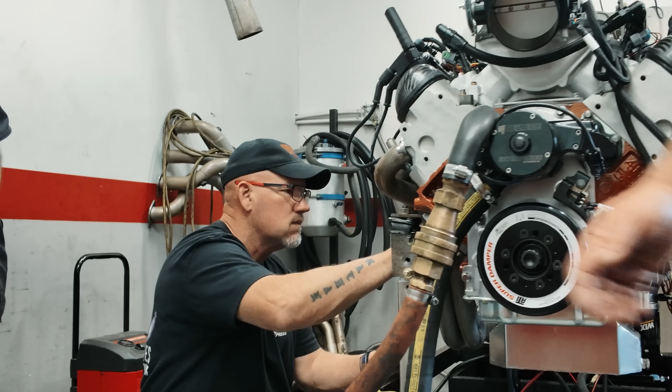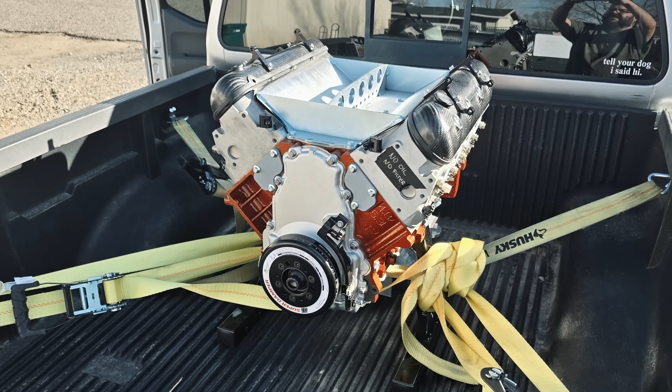It's been a long journey, but we're finally ready to get LS 5.0 on the dyno. We've got our intake manifolds ready, the engine in the back of the truck, and tomorrow we'll head down to Outlaw Race Engines in Phoenix and drop the engine off to get it on the dyno. Then we'll finally see what this thing can do.

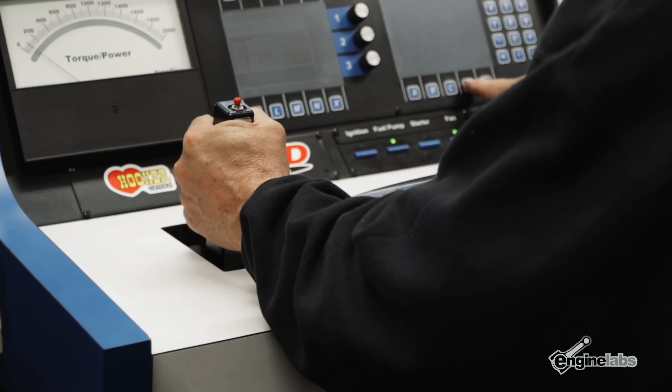The original LS vs. Coyote shootout was where we pitted an LS3 engine versus a Gen 1 Coyote engine, both with a $9,999 budget, to see how the two stacked up in peak power, average power, power per cubic inch, and usable power curve. In that competition, the Coyote was a Gen 1 long block with Manley rods and pistons with the stock crankshaft, making 11.3 to 1 compression.

The stock heads were outfitted with Comp Stage 3 camshafts, Comp valve springs and retainers, Boss 302 timing components, and a Boss 302 intake manifold. On the dyno, the engine made 510 horsepower at 7,600 RPM and 398 pound-feet of torque.

Now, it's time to hop in the truck and head to Outlaw.

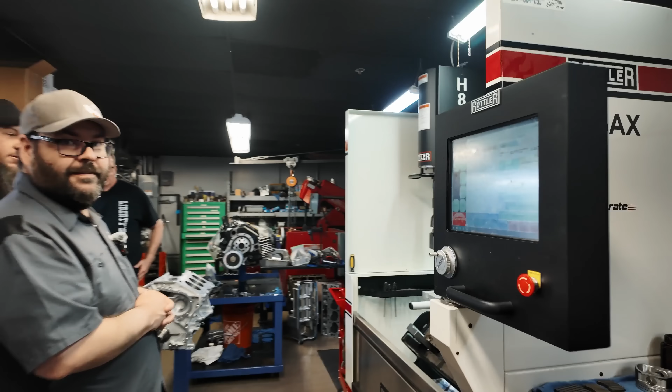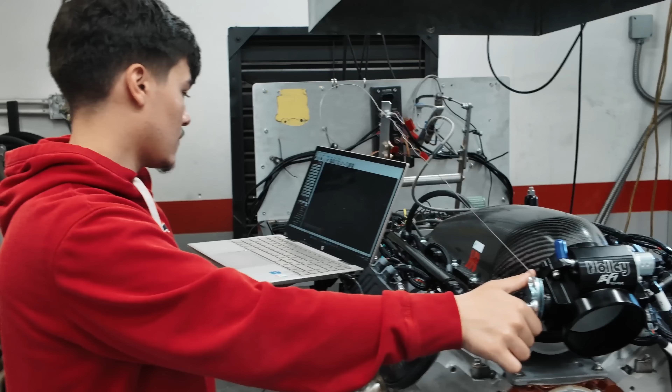All right, we're here at Outlaw Race Engines in Phoenix, Arizona to dyno LS 5.0, and I'm here with Richard. Richard, tell me a little bit about Outlaw. So Outlaw started in 2017 off of Bethany and 55th Avenue in a little 3,500 square foot shop, just as a machine shop only, actually. We didn't do anything with cars. We didn't even have an engine dyno at that time, but then as we grew in 2018, we moved to this building. Then engine dyno, hub dyno, full machine shop, and made it a service center.

Well, I noticed, we did a quick little walkthrough, and you guys do everything. There's a full build shop, a full machine shop. There's everything under the sun back there. It's not just late model stuff. I saw some pretty cool Coyote stuff. I don't know if I'm supposed to talk about that. Hopefully, LS 5.0 is going to be fun for you guys. It's not quite Coyote. I'm not even going to. I don't even want to say those two words in the same sentence.

Yeah. But we're going to spin pretty high. And so I have the utmost confidence that you guys are going to extract every horsepower out of that. So I'm really excited for that. So why don't we get back, because it's on the dyno, and let's get to making some noise. Let's go.

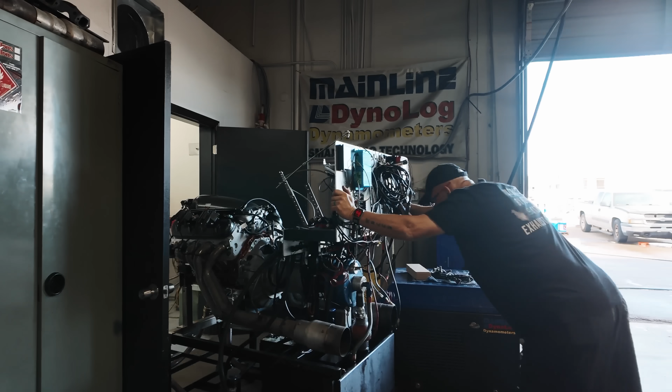Okay, so to recap, Project LS 5.0. This all started as a back of napkin type of project. I built an engine in Comp Cams' dyno simulator in order to answer a question we had from the first LS vs. Coyote challenge. So I built a 5-liter LS, and on paper, it looked like a great idea. So we started building it in real life. Unfortunately, we started building this at the beginning of 2020. We all know what happened in 2020, 2021, 2022. So this has taken a while.

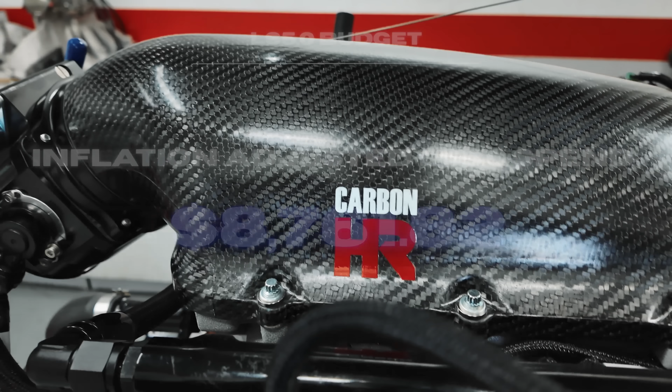But the idea behind this was to loosely mimic the rule set of the original LS vs. Coyote shootout. So that means 11.3 to 1 compression, 91 octane, no exotic materials, street style intake, and a $10,000 budget. Well, because we were doing this 6 years after the original LS vs. Coyote, we had to adjust the budget for inflation, but this came in significantly under the budget cap. So much so that we could have carbon fiber. Stock 4.8 liter crankshaft.

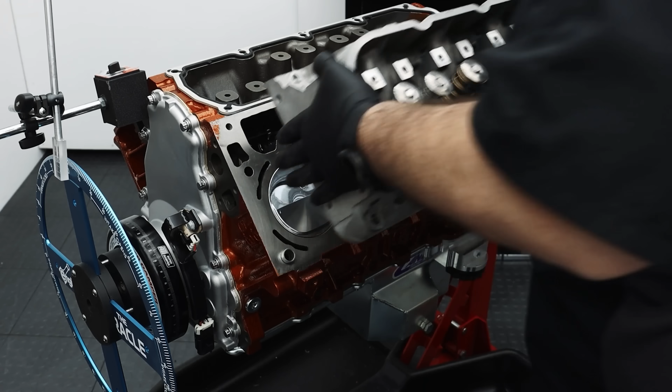It's a Gen 4 engine, so it's a 58X reluctor wheel. We've got Manley rods and Diamond pistons in it. Up top, we use the 799 heads that came stock on the LY2 core engine, CNC ported by Lingenfelter, with 2.02-inch intake and 1.575-inch exhaust hollow stem stainless steel valves.

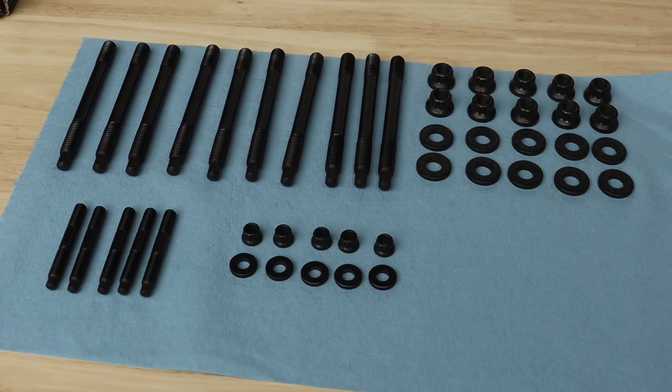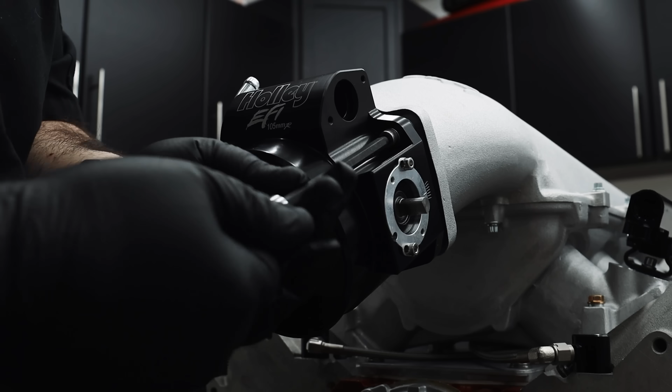We used an off-the-shelf Comp cam, Comp Evo hydraulic roller lifters, XDA pushrods, and Comp BSR rockers. In order to perform higher in the RPM range, we used a Holley Hi-Ram intake manifold with a Performance Designs 105mm carbon fiber lid with a Holley EFI mechanical throttle body. And it's just an all-around budget-focused, naturally aspirated LS engine that hopefully will spin to 8,000 RPM.

And ideally, the premise, going all the way back to the beginning, is that we can make an LS that has the same power and the same power band as the Coyote in the original LS versus Coyote. So the only thing left to do now is for us to go fire it up and make some noise and see if it's gonna do what we hope it'll do.

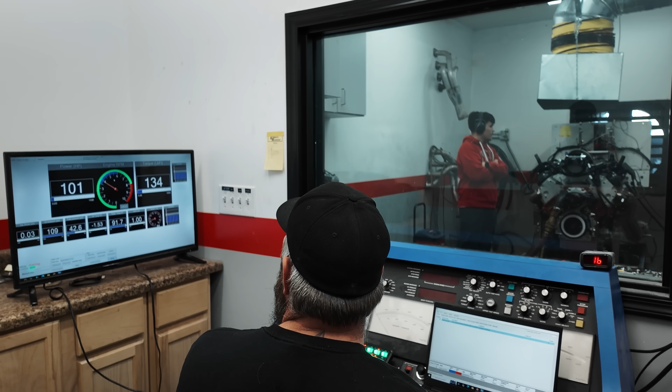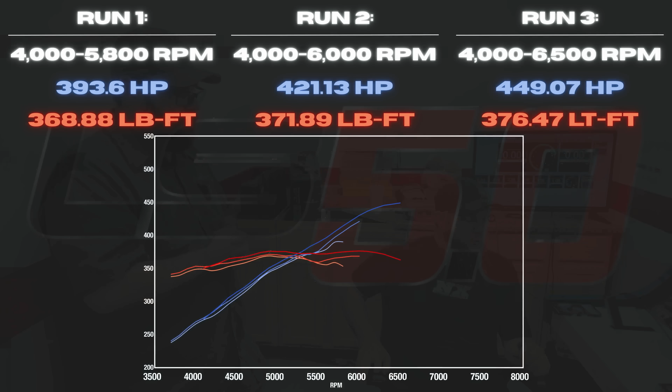So we've made a few pulls. Where are we at? What's going on? So far looking pretty good. We've made a couple short pulls, starting at 5,800, 6,000, then 6,500. It's getting better each time. We just tried a degree of timing there, picked it up another 10, so we're gonna look at the tune-up and make some more adjustments and see what we can pick up from here.

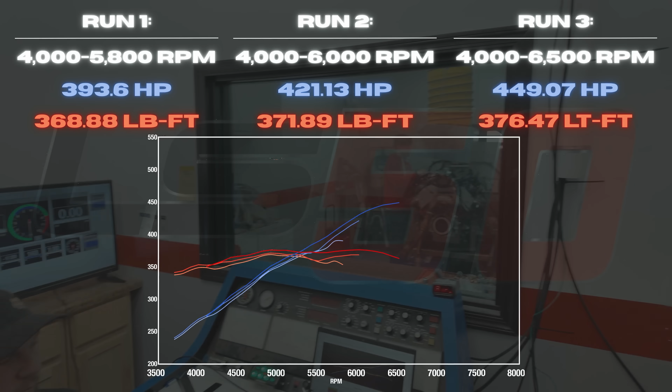Okay, cool. And everything's looking good? Yeah, oil pressure's a touch high, which will kill some power. But everything else looks really good. The engine looks real smooth. It doesn't look like there's any issues so far, so it looks really, really nice. Okay, and the number we got to, we're at 450, but that's only spinning it to 6,500. Yep, 450 at 6,500, so we're going to turn it up to 7,000 here and see what we do. All right, sounds good.

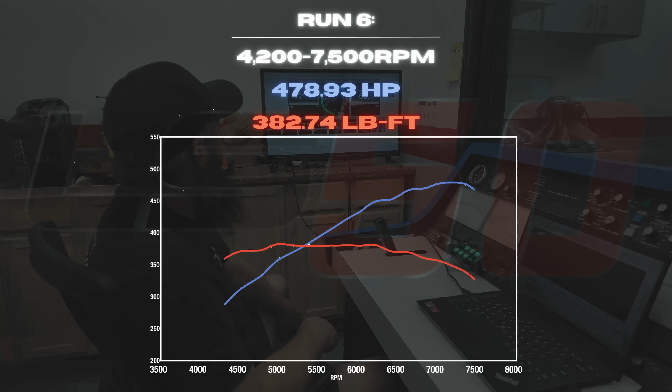All right, so it looks like we bumped up the RPM a little bit. We finally made a 7,500 RPM pull. Nothing came apart. But what are you seeing on the data? The engine looks good. It's liking every fuel correction and timing correction we make, so I still think we have some left in it. I think probably another 10, to be honest.

By the time we look at some plugs here, read some stuff, maybe try a different plug, and then pull a little bit of fuel out of it, I think we might be able to get to 490 if everything goes well, maybe 500, but all we can do is try. Okay.

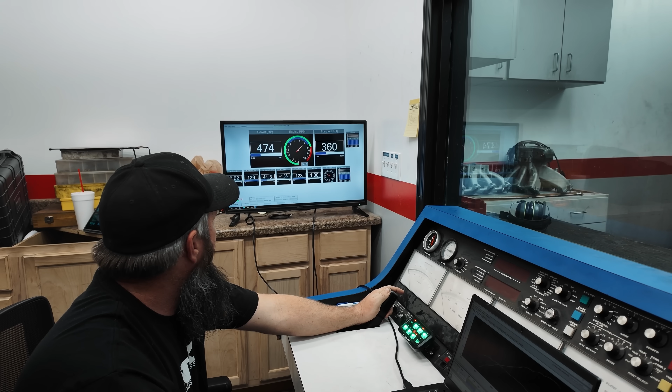Plateau. That was it, man. Yep. All right, so we've hit the plateau. We made fuel and timing changes and it didn't change anything on the dyno, which means we're there. Yeah, it's plateaued now. We've tried plugs, fuel, timing, looking at everything, and that's about all it's got for this combo, I think. So now we're gonna go do that dual quad lid and see how much that picks up. Yep, hopefully we can see quite a bit more gain.

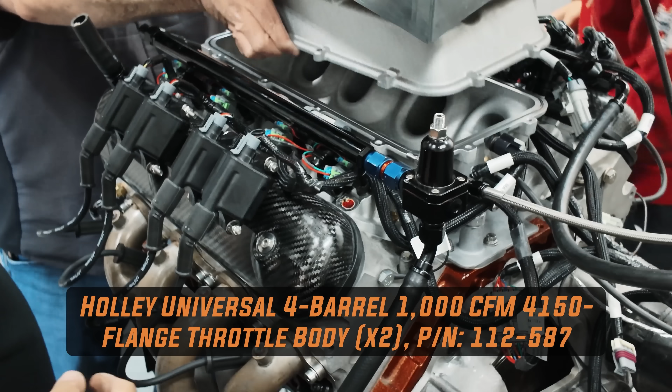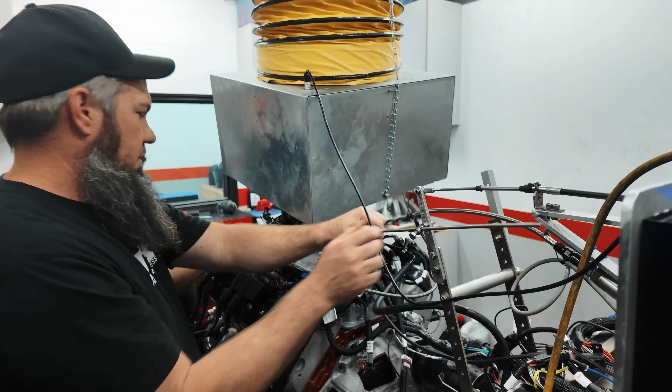We had an ace up our sleeve. When Holley originally sent the Low Ram and 105mm throttle body, they also sent their dual 4150 flange plenum lid along with a pair of their 1000 CFM 4-barrel throttle bodies. The idea behind that being, in a small displacement, high RPM application, the extra airflow along with the more direct path to the intake ports would net gains on the dyno. So we took off the 12 bolts, swapped intake lids, and got back on the dyno.

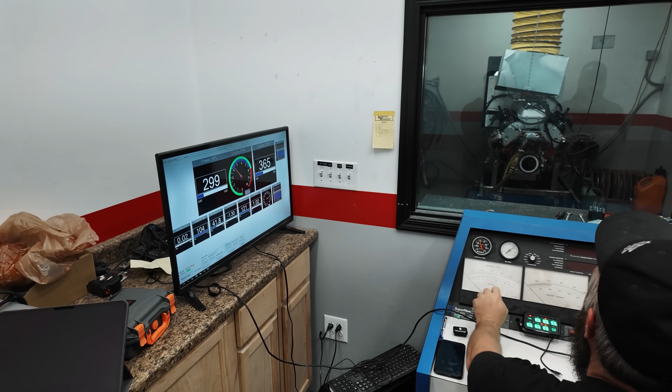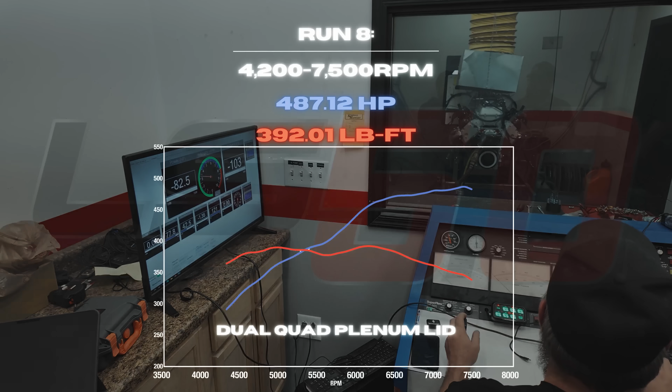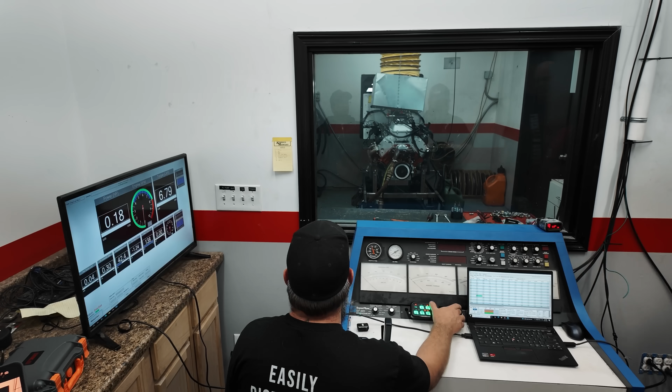Even when you raised it up? Yeah. What's it, 13.0 still? 13.2. Oh, you took some more out of it? Put it back. Yeah, put it back. Put 12.8, put another degree in. Put a degree. Hop back on it. Hey, yep.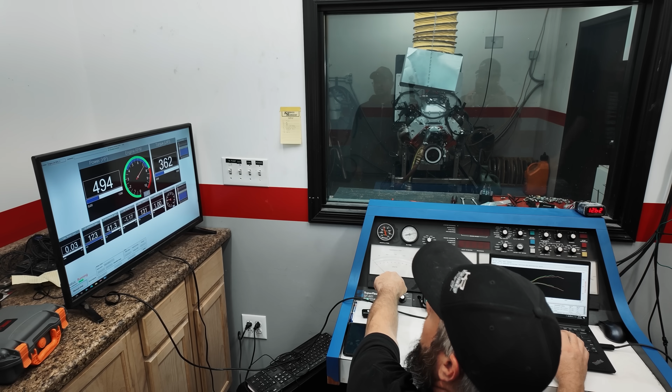All right, so we swapped to the dual quad lid. Yep. And other than fighting the idle a little bit, we made a couple pulls and it's showing some promise, right? Yeah, definitely showing some promise. Definitely made more torque, more power. Moved it up a couple hundred RPM to make peak, but so far it's looking really good. Okay, and we still have more to work with because it didn't lay over like the front-facing lid did. Yes, we do have some more room. We're going to try some more things here to see if we can't find some more power. All right, sounds good.

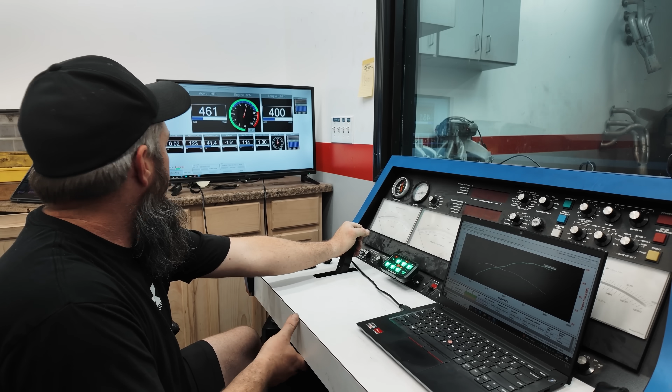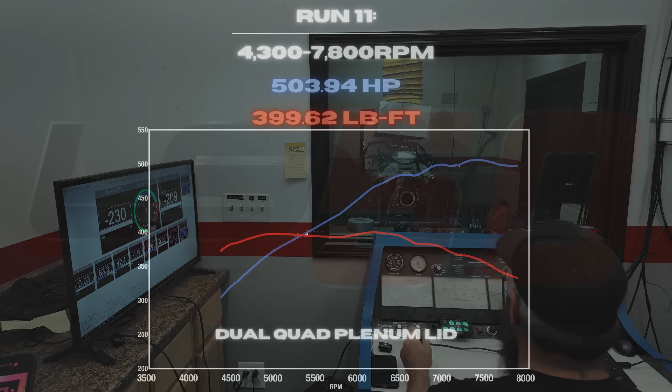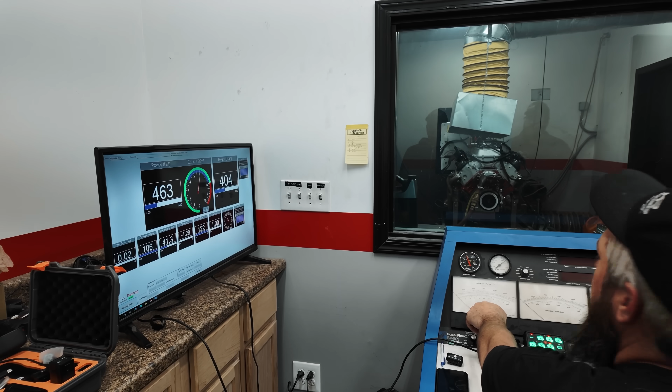It liked that degree. It did. I saw 510 on that one. Yeah, whether it prints it or not. Yeah. That's got to print one, but it's going to print 507 or 508 or something. So

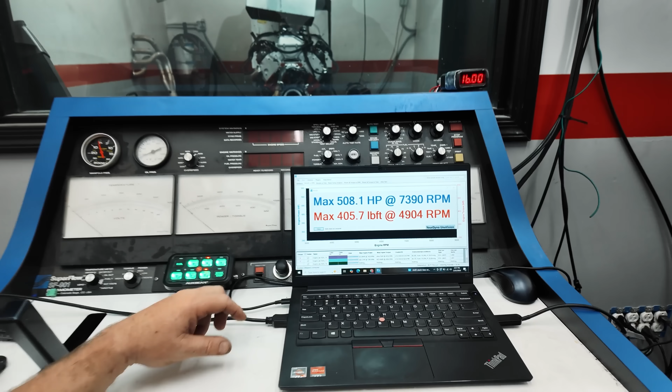Okay, so what's our number? It's 508 at 7390. Okay. And 405 at 4904. Okay. So as the test was concluded, it looks like that's the best we made with it, 508 and 405. With all the tuning, different timing, different air fuels. We tried everything we could possibly to get there, and we got just a couple numbers short.

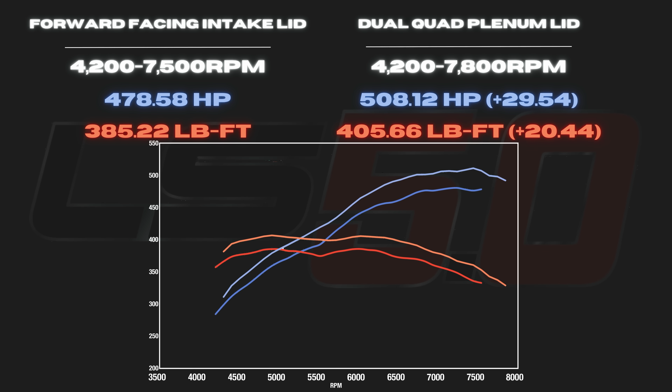All right, so we're done for the day. We peaked at 508. Yep. And what, 405 pound-feet of torque. Mm-hmm. So some observations. We are about 400 RPM short of our peak that we estimated. Yes. We are right there with the Coyote. Yep. So what do you see as being a path for improvement at this point?

With the same combo as it sits right now, we probably could try maybe a different camshaft. I don't really know what else to try other than that. Maybe some cylinder heads if you really wanted to try different port design, maybe a different manifold, maybe a higher one, something like that. So that's probably really it. We've tried a lot of stuff today, so I feel like we've got a pretty good idea what we may be able to try next time.

Okay, so now you mentioned camshaft. From what you're seeing, because we're in the mid-range of a shelf cam. Yes. So Comp actually has, I think, 3 or 4 cams larger that would get us from the 603, 610 lift into like the 620s and 630s. Yes. And then we could add a significant amount of duration off the shelf. Yeah, and it just all depends on if the manifold likes it.

There's other things that come into play at that point, but without changing the manifold, trying some things there, or trying a different camshaft with this manifold combo, we don't really know. Is it the cam that's left us short, or is it the manifold throttle body setup that's left us short, or is it the cylinder head design? There's all those to take into play, so you just gotta start trying more stuff. Yep, and LS 5.0 is a science experiment, so it's time for us to try some new stuff, I think.

After taking some time to reflect, we did match the Coyote's performance and power band from the first LS vs Coyote, but we did it outside of that rule set, with the dual quad throttle bodies. Also, oil pressure was way too high for this, so we have two options. Call it a day and move on to LS 5.0 version 2.0, or call a mulligan and take another shot at trying to hit that 510 horsepower number within that original rule set. Well, because I don't like walking away from a challenge, I'm going to call a mulligan here.

What does that mean? Well, we're going to swap out the short ram lower intake for a high ram base, add a little bit more camshaft, and swap to a Melling 10295 oil pump. The goal in doing that is to match the Coyote's numbers with a forward-facing intake lid, and then beat it with the dual quad lid. From there, we'll be able to move on to the version 2.0 parts that have been sitting in the shop, patiently waiting for their time to shine, and really get wild in the small bore high RPM world.